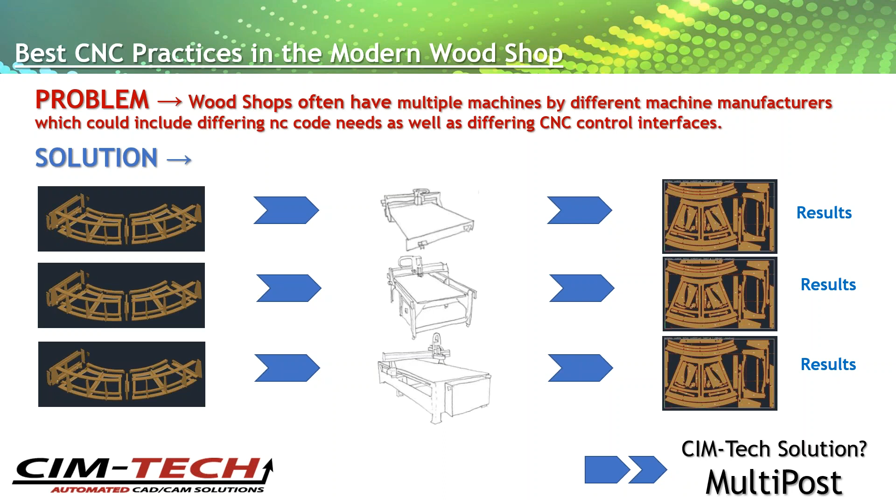So we know you have these different machines and you may need to program them for different outputs to each router. So here you could see, I want to take a job and run it to machine number 1 or machine number 2 or 3, and I have to output different types of NC code for each one of these machines. The solution we have in our new version here is something called multi-post.

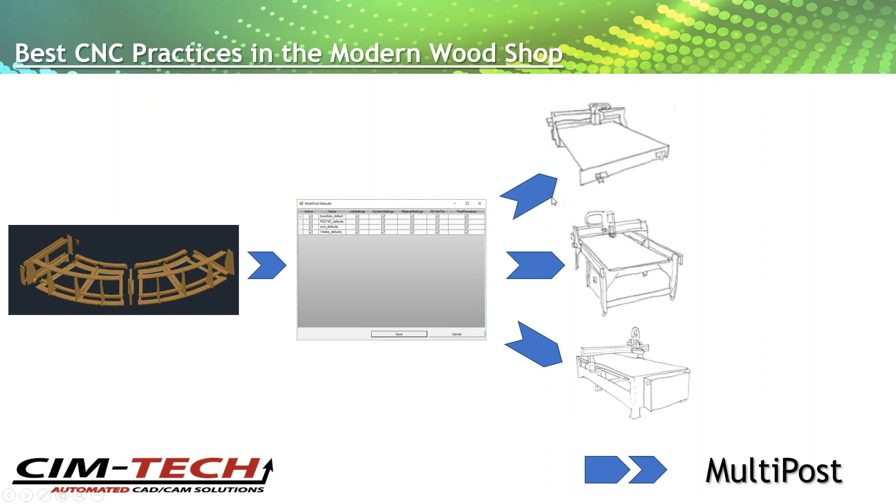What this lets you do is take any single job and check some boxes to have the job run through different machine configurations. And you could choose different settings that you want to use as well. So not just the job settings, but material settings and variables in the post processor. And what that's going to do is output that same job to multiple machines at one time, and you'll get the results for multiple machines.

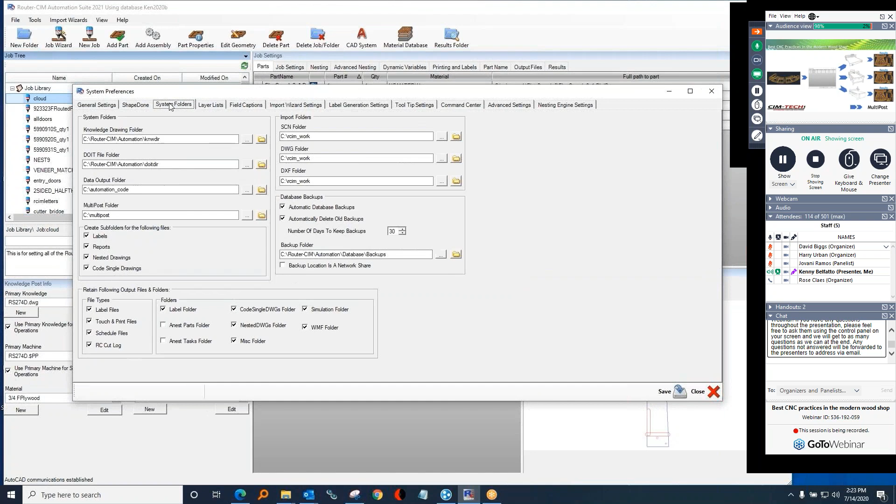So here's how that works with our Router-CIM 2021 automation suite. We have a setting where you're going to place a folder. You make a folder, and we call it the multi-post folder. In that folder, we're going to put what's called a pack and go for each of your jobs. Now that's going to give you all the configuration settings, the machine origin, the NC code file extension, for example, the material information. All that is saved inside what we call a pack and go that has all your job settings in there.

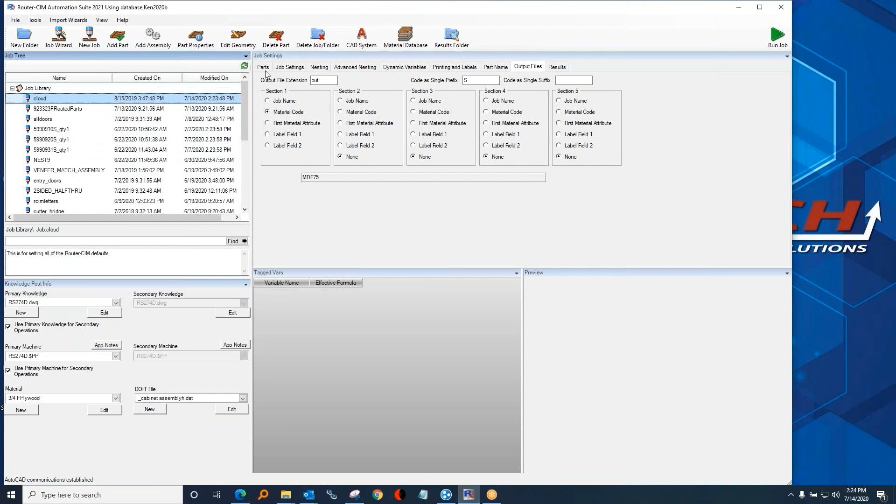So once those are set up, you have your folder set, you have your different machine configurations, you could take any job and just right click on it and pick set multi-post options. Here we're going to pick 3 different machines in this list. We've got post processors for every kind of router there. So I'm just giving you an example showing 3 different machines that are running.

And in reality, it's going to actually run 4 different machines because the job had its original configuration and then the 3 additional multi-post configurations. So you'll actually get, in this case, 4 different outputs when you run the job.

We'll get standard NC code output, and then they'll show examples for outputting to a Biesse, to an SCM and to a Weeke. But we also, of course, support all the different machines, whether it's an Onsrud, a Thermwood, Northwood, Komo, you name it, we've got the posts for it. We can write the posts. So this multi-post feature is something that will save you time because it takes the same job and runs it through all those different configurations for you.

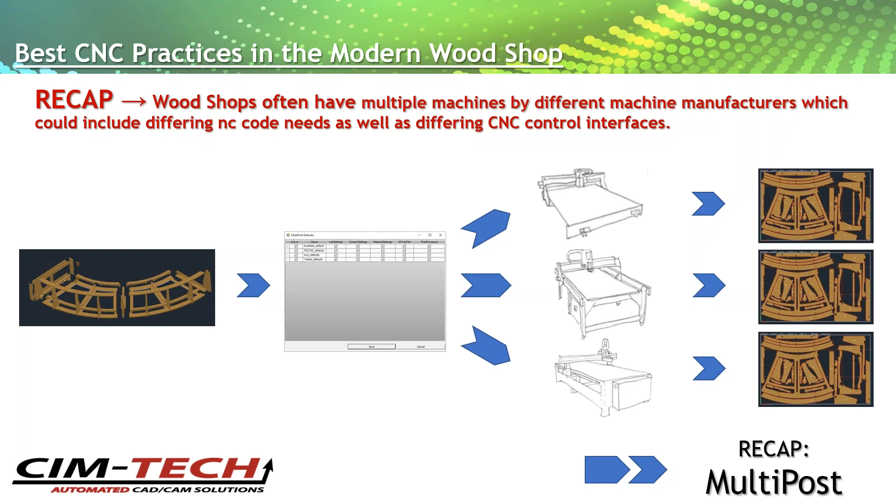Well, Kenny, based on what you're saying, it sounds like this can save me a lot of steps when having to juggle work on different machines and all that comes with having to program different machines throughout the day. Another problem that we sometimes run into with programming our CNCs is how to handle small parts on the machine. So the next question I have is, in handling and holding small parts in a nest, how do we get around this issue now? But before we get into that, we have our next poll question.

What machining tactics do you use to hold small parts? Onion skin parts, tabbing, multiple passes, different feed rates or tools, or other? And we're going to give everybody a few seconds to put in their answers.

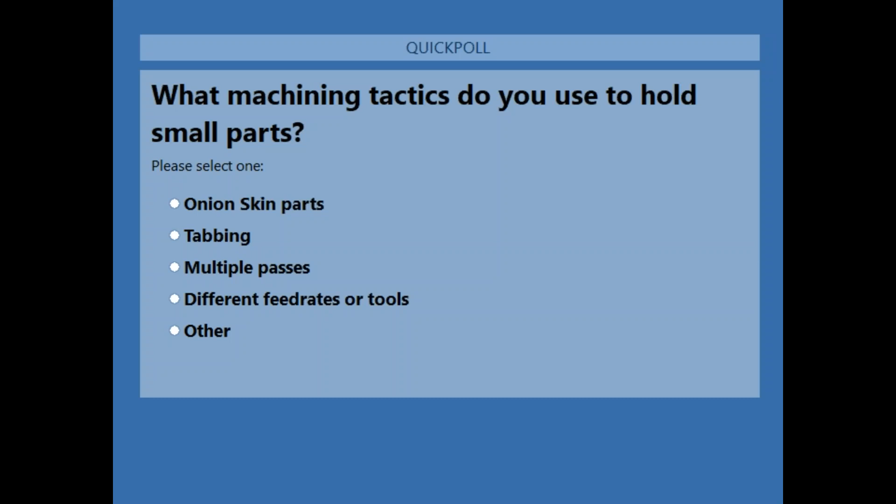Okay, thank you for answering those questions on small part hold down. So we know this is an issue because the parts are held with vacuum in many cases. And there's only so much vacuum to go around. And when you have these little parts, there's just not enough to suck them down to the table.

A traditional method that's used is called onion skin, where you go almost through the part in one pass, and then a second pass cuts it all the way through. So the theory there is that you're only cutting a little bit on the second pass. It's less likely to put pressure on the part to move.

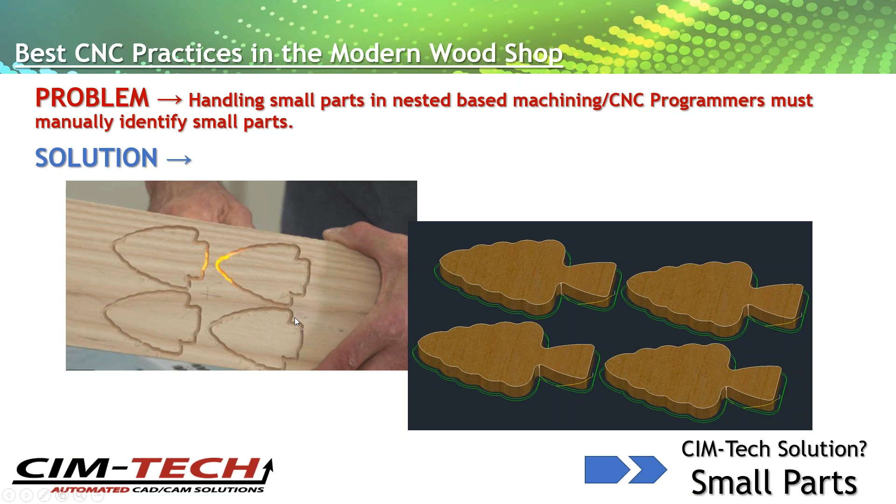This onion skinning is very popular. It's like the most common way to do it. It's a powerful way to hold parts, but you're cutting around the part twice.

There's a better way to do that, and we've invented this feature called Tab at Cut Start, which lets you either put in a distance for a tab or a percentage. So for example, if I put in 40%, I can cut around the part 1.4 times or 1.5, 1.6. Anything less than 2 times around the part is going to reduce your cycle time, right?

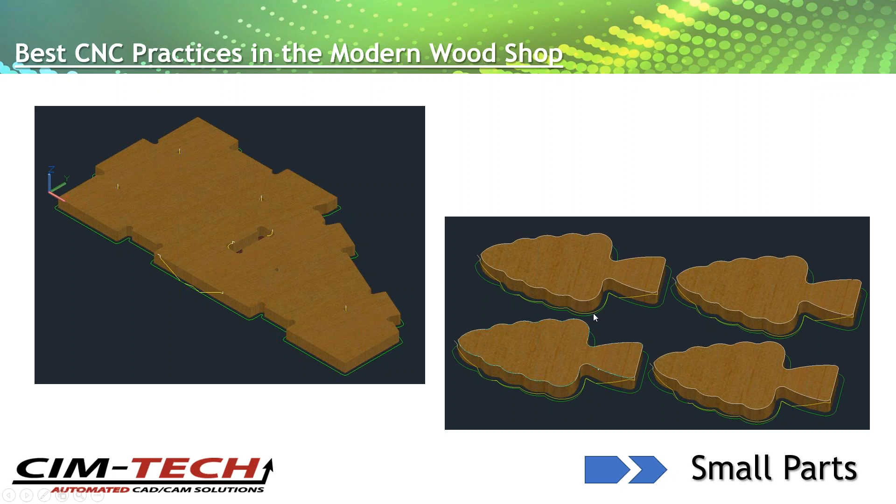And over the course of the day, that can really add up. And then the week and the month, you can get hours worth of extra machining out of this, especially if you do a lot of small parts. Here you'll see the tool lead in and right away make a tab, and it's a ramped tab, so it ramps up and then ramps down. It's 40% of the perimeter, and it cuts around, then it overlaps, cuts the tab off, and again, it sneaks out the way it came in.

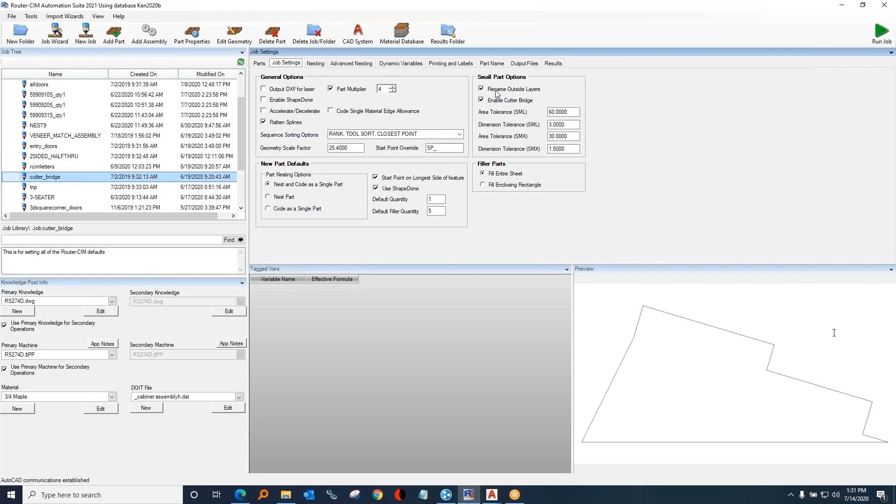And here's some other examples to hold small parts. We've got many different ways to do it. So that tab at cut start is just one way. Another way may be to allow an extra bridge around the part. So small parts can have a cutter bridge, and you could define what is a small part based on a couple different settings. In Router-CIM, you have an area tolerance for small parts. So anything that's 60 square inches or less, or 3 inches in X and Y, it's called a small part.

And you can even define an extra small part. So that would be 30 square inches or less, or 1.5 inches in X or Y. So you have 2 levels for small parts, and that gives you different strategies. So the smalls can have a tab, and the extra smalls can use an onion skin, okay? Or you could just have them in a lower rank number. So the extra smalls get cut first when you have the most amount of vacuum, and then the smalls are second when you still have a lot of vacuum. Then the larger parts will be last.

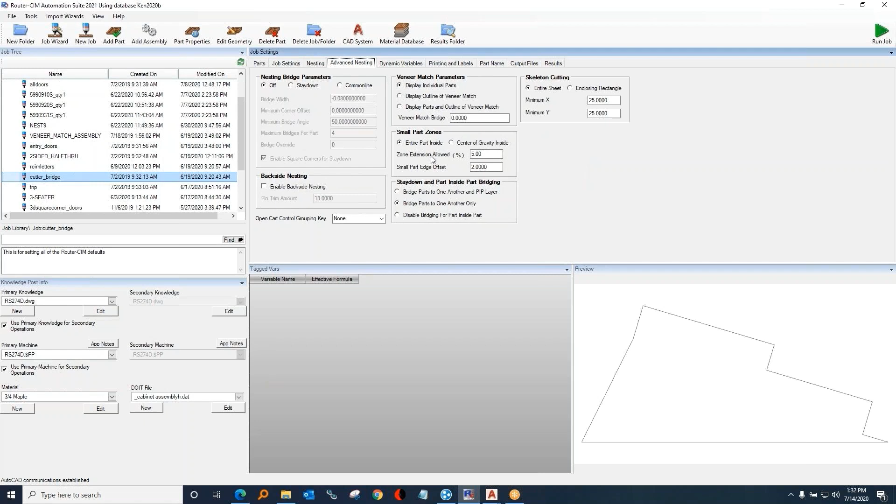So you could define 2 levels of small parts. And then the other one there is called cutter bridge, that allows you to put in a halo around the part so that there's room, there's some meat for the tabs to hold on to. Now, a lot of machines have a lip around them that's not very useful for vacuum. So I have a small part edge offset of 2 inches. In this case, you'll see like a yellow rectangle, and all the small parts are staying inside of that yellow rectangle because I don't have a lot of vacuum around the edge of the router like that.

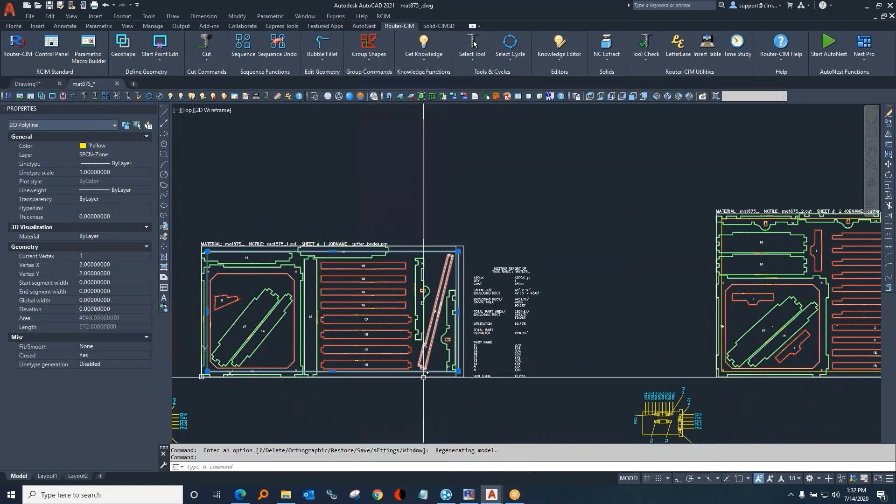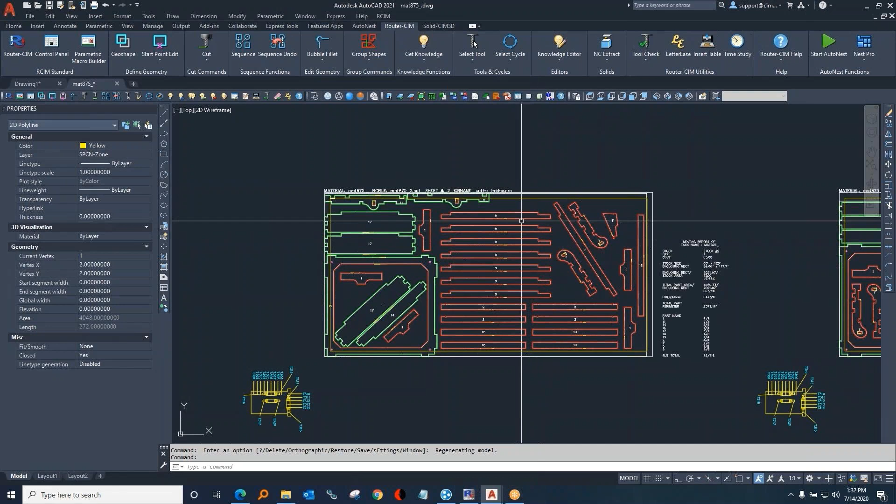So small parts can stay away from the edge by that 2 inches, but large parts can go right up against it. You can even define a drawing that represents the vacuum zones on your table so that you can have small parts avoid certain areas. So it can actually be an AutoCAD drawing of your table with the zones laid out where you want your small parts to be, and they can avoid areas where there's low vacuum. That's what you're seeing there is the cutter bridge for the small parts. You got a bigger space so that their tabs will hold on to something, and they're staying away from the edge by 2 inches.

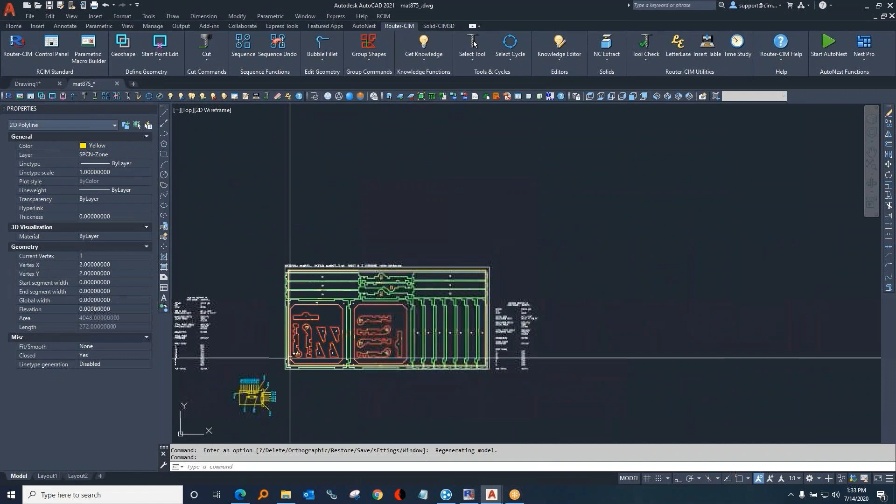Then in the next example here, we're actually going to draw a tool path to use that tab at cut start. So this is interactive Router-CIM. You're in AutoCAD, and you can activate it as a button pick right inside your AutoCAD session. And we are using AutoCAD 2021 now. We're just starting to ship our 2021 version.

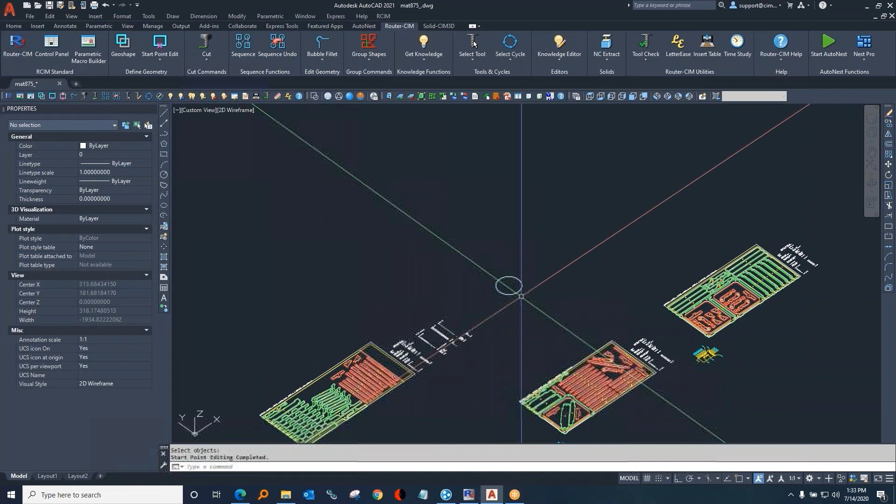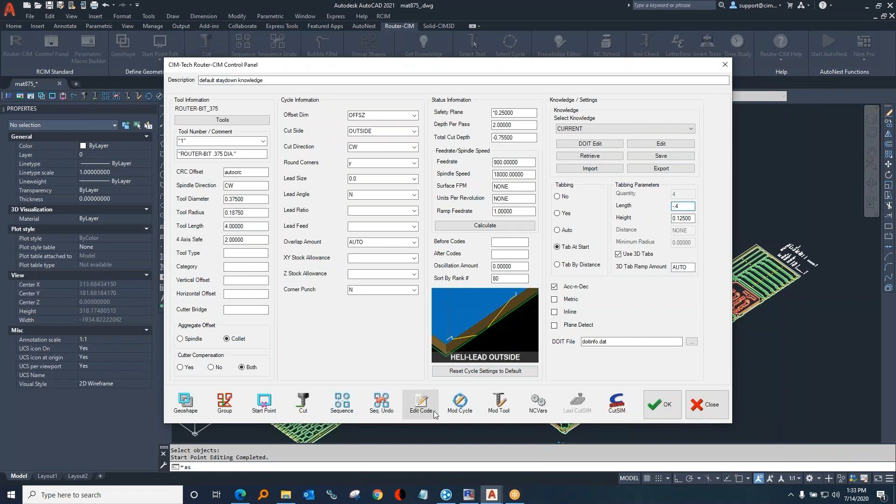And here is the helical motion. We've got different types of tool entry. That helical is going to give you the best cutter life and the best tool life because it's not putting pressure on the spindle bearings. There's a total depth tab at the cut start, and a negative decimal means a percentage. So it's going to be 40% of the perimeter at the tab at the cut start. So this one will lead in, make that tab. It's, again, the ramped tab, so it ramps up and down.

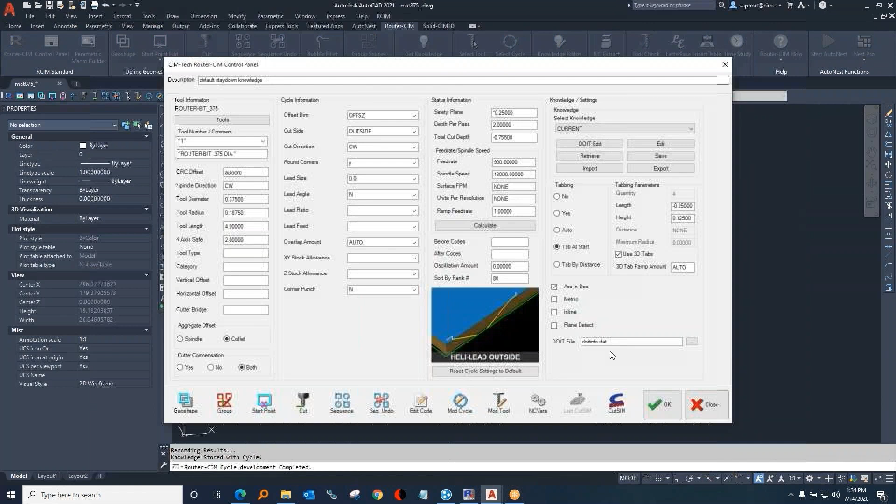Instead of lifting straight up and straight down, which can cause a burn mark on your part, it's a ramping motion, nice and smooth at your router, generating arcs wherever possible. Here it's just erasing a tool path using AutoCAD's erase, changing it to 25%, and now we get a smaller tab, about 1 1/4 times around the part. It has the same effect as onion skin cutting around twice, but you really only need to go 1 1/4 times, saving you 75% of a tool path.

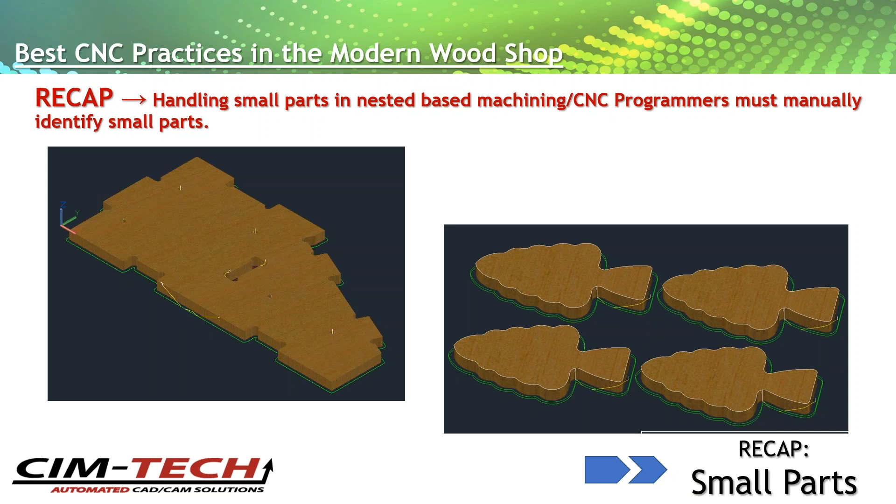Pretty awesome stuff. Thank you, Kenny, for going over some of the issues when it comes to handling small parts. And these solutions sound like plenty of great ways to handle them effectively day to day. Another problem we have in working with our CNCs, whether it's small parts or multiple machines, is controlling the flow of the parts from the nest.

So the next question for me is, how do we work around this now, and what else can be done about it? Before we get into that, we have our next poll question. In nested-based manufacturing, how do you control the order in which the parts are nested on the sheets? Do not control and let the operator sort out the parts manually by only processing one set of parts job at a time, manually by having the CNC programmer lay out the parts, or automatic with a scheduling system to create unique parts. We'll give everybody a few seconds to put their answers in for this one.

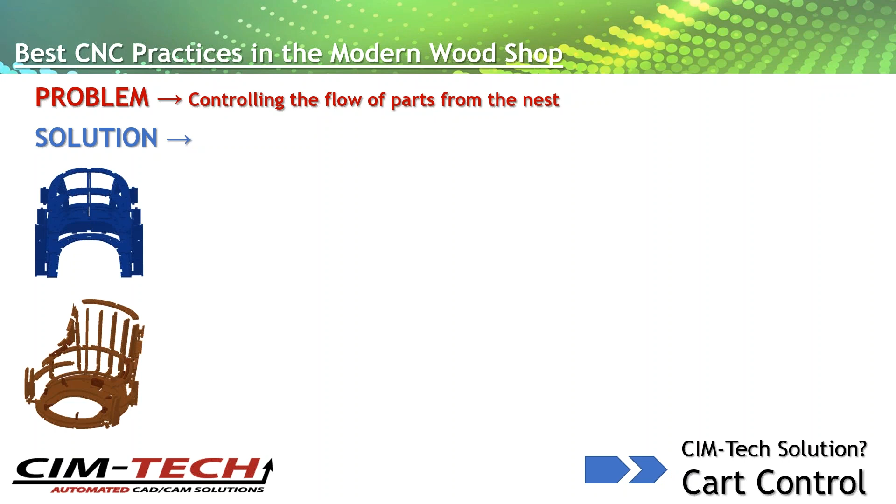We know that controlling the flow of parts from a nest is important, and we have features specifically for this. For example, if I want to run these two jobs, and if I run them individually, I don't get the best yield. But if I'm able to join those two jobs together, I get a better yield. Now that's just two jobs mixed together. What if I had 3, 4, 5, 10 jobs mixed together?

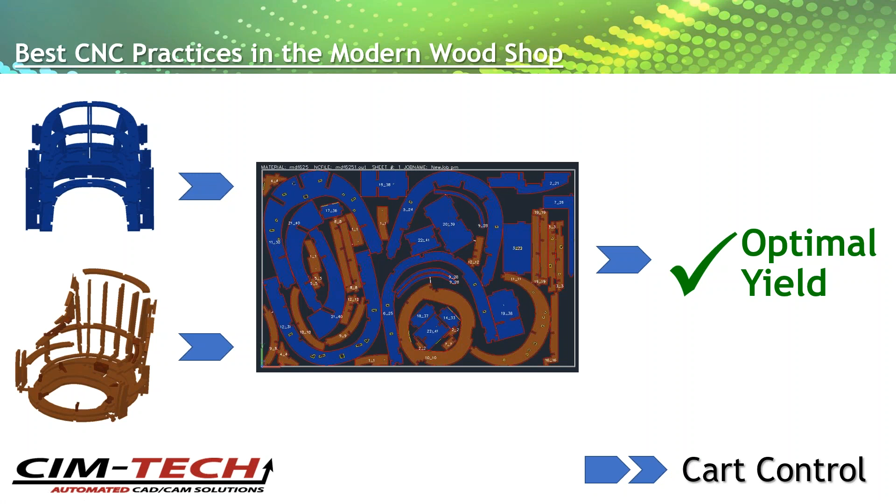Well, that's what we call cart control. You would get a great yield if you mixed 10 different jobs together, but on one sheet you might have parts for all 10 jobs, and now you maybe don't have enough room to put 10 carts around the router to unload the parts onto. So we have a feature called cart control.

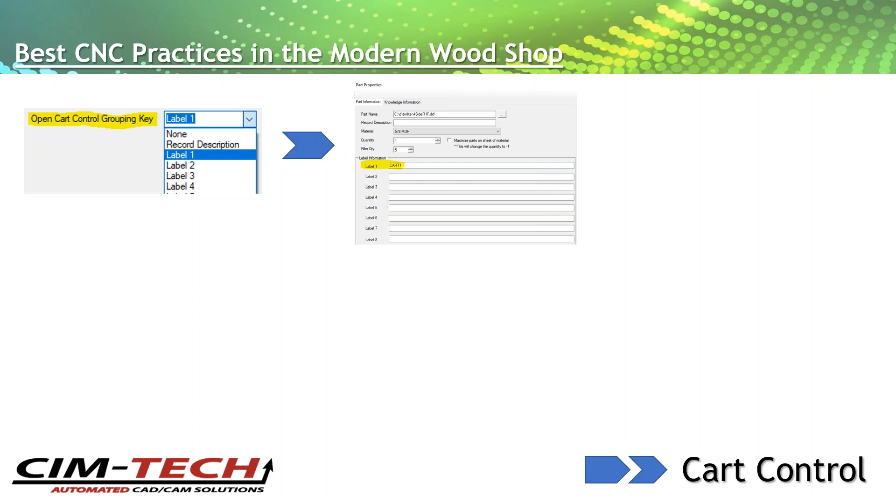The first thing you do is you tell it, what is a cart? Well, the cart, in this case, maybe it's just one of the label fields. So any of the parts that have a label field number 1 that says cart 1, that becomes a cart. And that could be like a work order number, a job number, a customer name. It could be a room, like it just could say kitchen, and everything that says kitchen is one cart. Everything that says office is another cart. So you set up what's a cart.

Then you tell the material how many jobs per cart you'd like to allow. And there's a protective open cart threshold, a percentage in there. So it says, hey, look, if my yield falls below 80%, then go ahead and add another job to that sheet till you get to 80%.

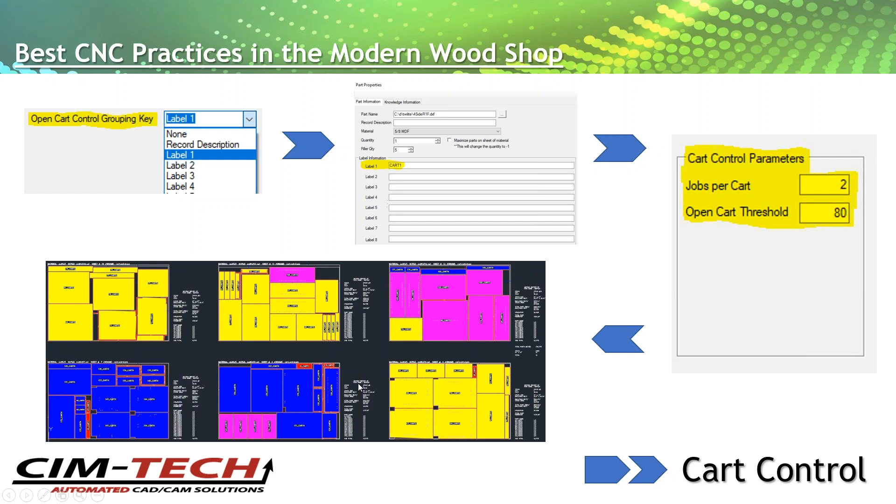So with that result, here you've got 4 different jobs represented in different colors, and there's never more than 2 on a sheet at once, except for this sheet here where I have 3 different colors. So it fell below 80% and was able to add some other cart to this until it achieved 80%. This allows you, and in this case I'm just showing 2 so it doesn't get too busy, but you could have, obviously around the machine, room for 3 or 4 carts, or you could consider them a pallet. You unload the parts, put them on a pallet. So this allows you to control your output, controlling the parts once they come off the router, and giving you a better yield while protecting your yield as well.

Hey Kenny, I like that this cart control feature lets me efficiently manage all of these different parts, but still lets me maintain control of my yields when running multiple of these larger jobs at once. But how do I know which part gets which label on the nest?

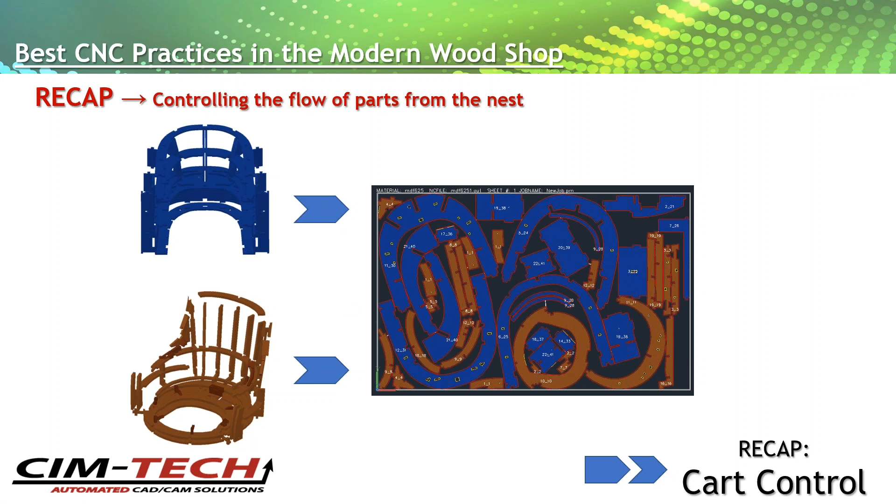Before we get into that, we have our next poll question. Do you use custom labels to help identify parts? Yes, manually write label information on parts. Yes, using an automated labeler. No, but would like to. We'll give everybody a little bit of time to put in their answers.

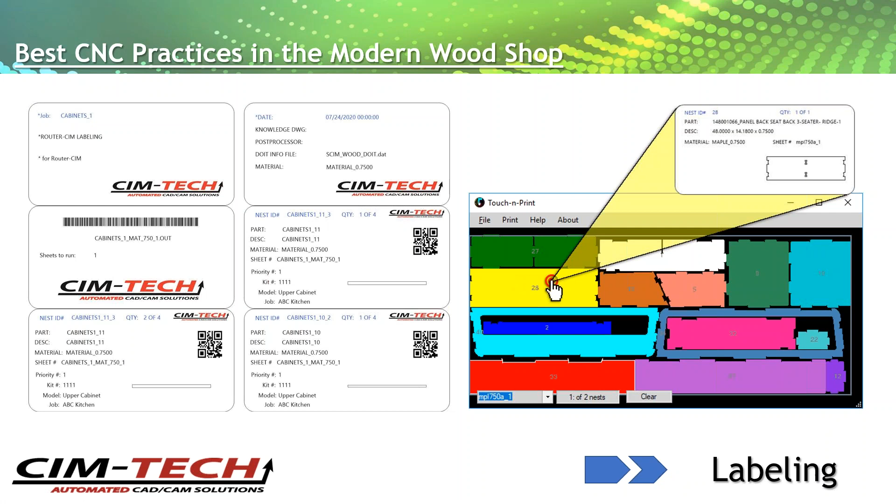So we've got a couple different options: manually printed labels where you stick them on there. By the way, you'll know where to put this label when you look at the printout that Router-CIM gives you. You've got your part name on the printout, and it matches the label name and nest ID, and you stick the part on there. Or use the Touch-n-Print where you could see the part, touch it, print a label. And of course, the newer machines that have automatic label printing, we've got that too.

Awesome, Kenny, thanks. Just to bring it home for everybody, it's important to know that certain practices in your woodshop can save you time and money. This is especially important in today's environment. Whether it's difficulty programming different machines, handling small parts, poor nest yields, or any other issue you may face, there are oftentimes solutions out there that can help you. Especially us over at CIM-TECH, we strive to make things easier in your woodshop.